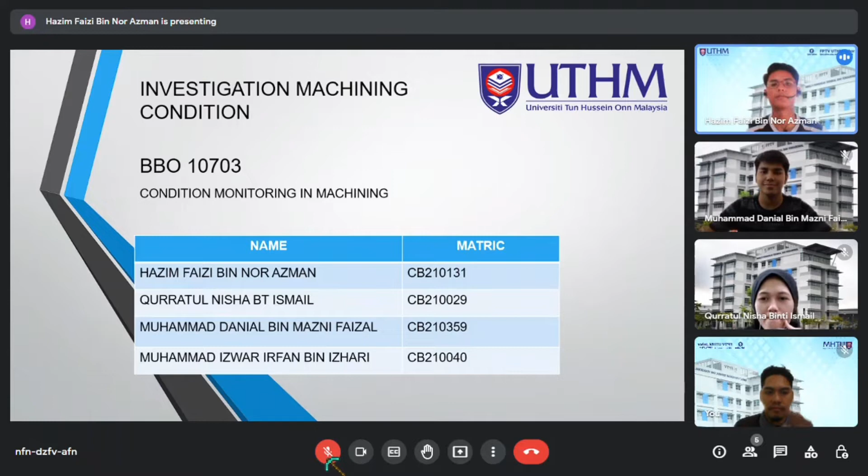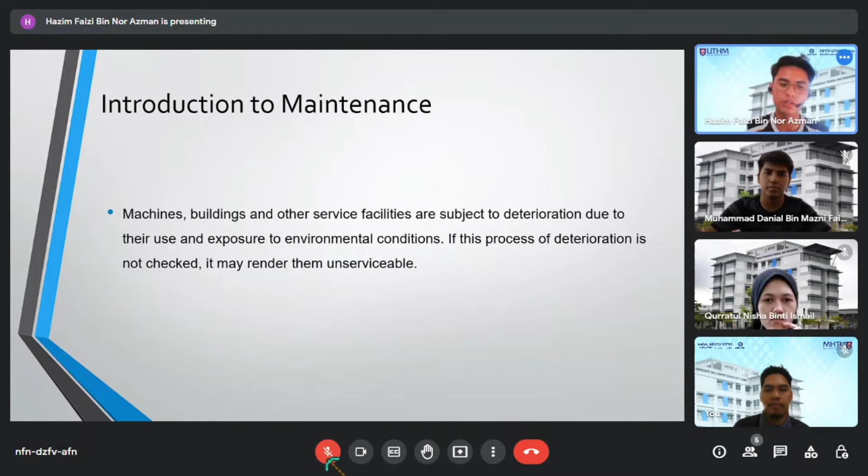Introduction to maintenance. Machines, buildings, and other service facilities are subject to deterioration due to their use and exposure to environmental conditions. If this process of deterioration is not checked, it may render them unserviceable. Next, I will pass it to Qurratul Nisha.

Thank you, Hazim. Next is smell. The smell of the coolant becomes offensive long before the coolant stops being effective. Next is compounding. The costs associated with wasting good coolant are the disposal costs of getting rid of it. Increasing the useful life of coolant has a direct saving on the cost of manufacturing by reducing the cost of the coolant itself and reducing the fees associated with coolant disposal.

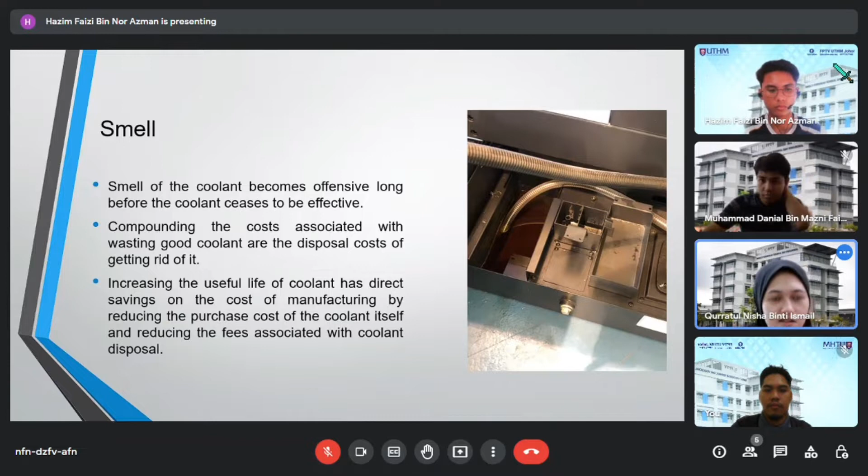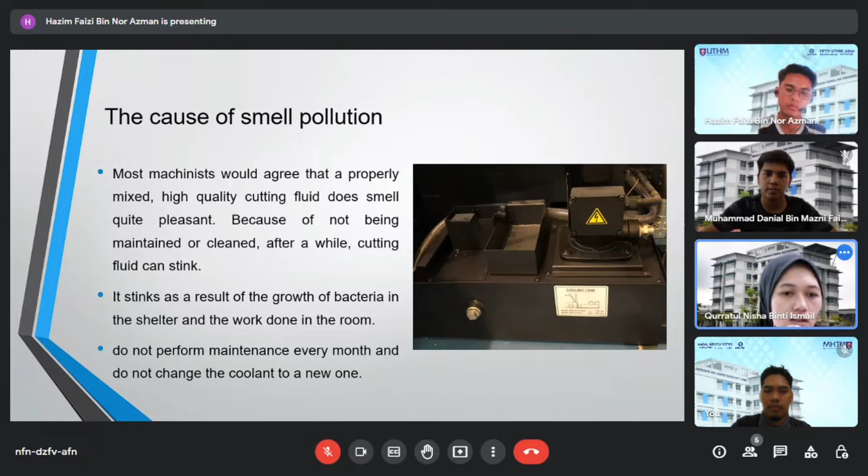The cause of the smell pollution. First, most machinists would agree that a properly mixed high-quality cutting fluid smells pleasant, but because of not being maintained or cleaned, after a while the cutting fluid stinks. It stinks as a result of the growth of bacteria in the shelter and the work done in the room, and not performing maintenance every month and not changing the coolant to a new one. Okay, thank you, Qurratul Nisha.

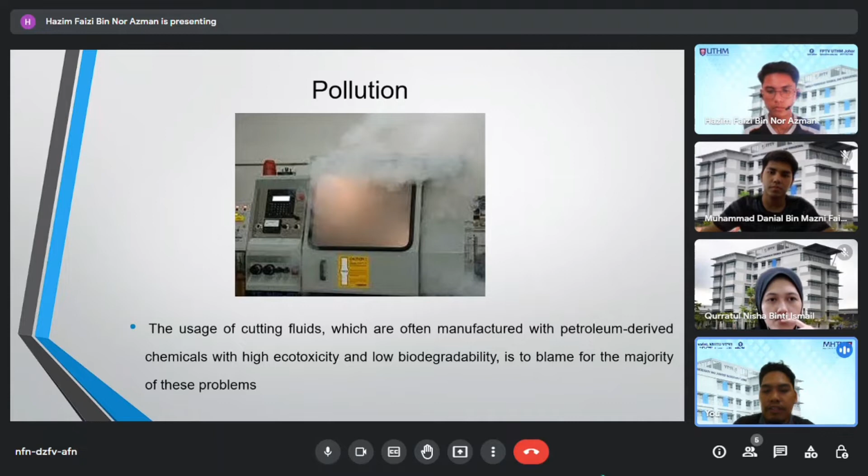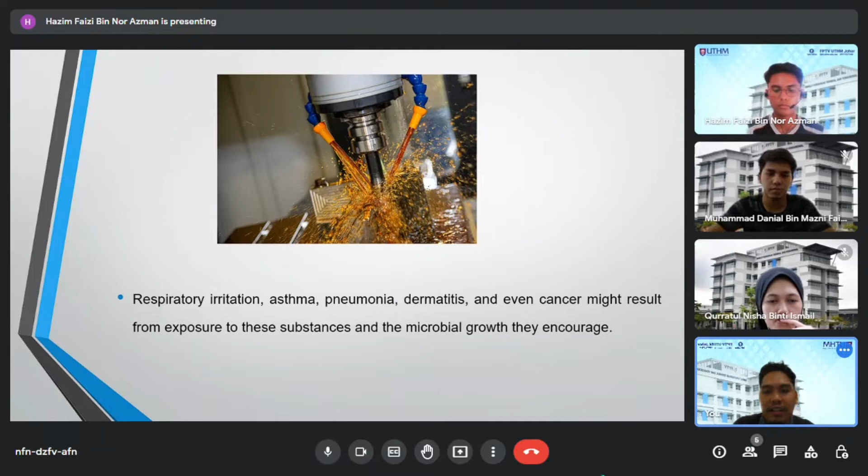Okay, next I will continue about pollution. The use of cutting fluids, which are often manufactured with petroleum-derived chemicals with high ecotoxicity and low biodegradability, is to blame for the majority of this problem. Respiratory irritation, asthma, pneumonia, dermatitis, and even cancer might result from exposure to these substances and the microbial growth they encourage.

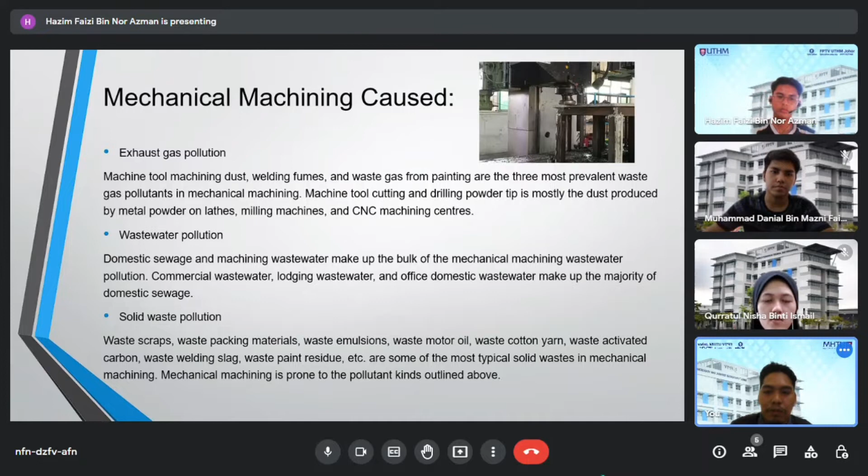And last, solid waste pollution. Waste scraps, waste packing materials, waste emulsion, waste motor oil, waste cotton yarn, waste activated carbon, waste welding slag, waste paint residue, etc. are some of the most typical solid waste in mechanical machining. Mechanical machining is prone to the pollutant kinds outlined above.

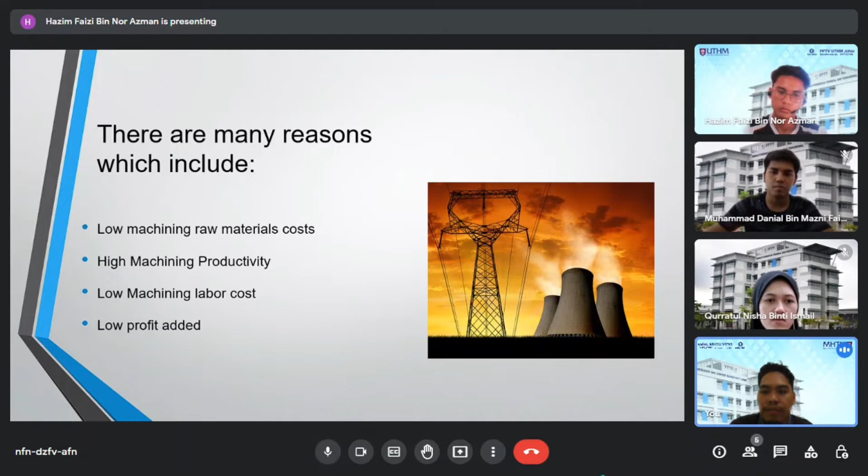Next, there are many reasons, which include low machining raw material costs, high machining productivity, low machining labor costs, and low profit added. Okay, next slide, I pass to Hazim. Thank you.

Next, I'm going to talk about noise on CNC milling. Users who are experienced with CNC machines are aware that noise will be produced when the high-speed spinning cutter head makes contact with the material. The knife on the tool is particularly prone to wear and breakage. When using a CNC machine tool, if the cutting sound is loud or screaming, it indicates that something is wrong with the machine's condition and allows for a quick analysis.

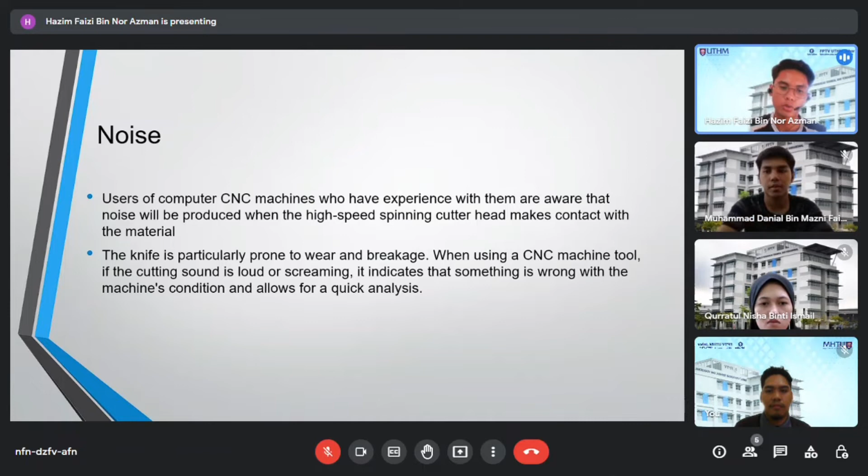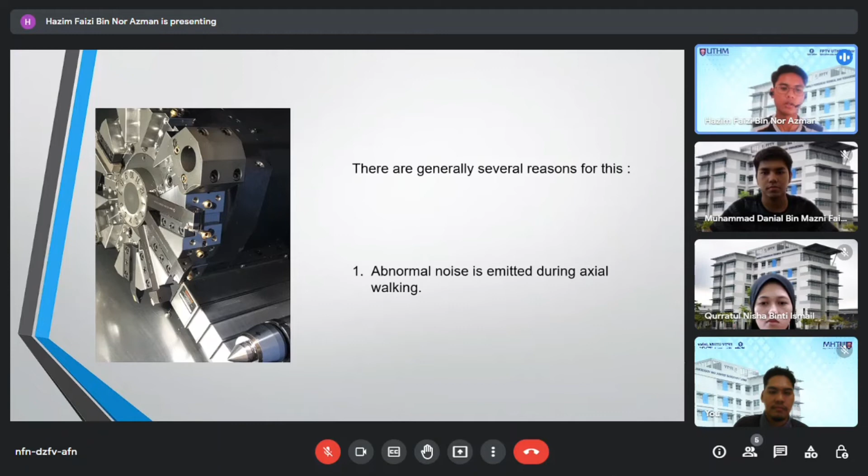So there are generally several reasons for this. To be precise, three reasons. Number one is abnormal noise emitted while moving: when you want to move the tool on the z axis or x axis, it will make a sound that is unpleasant, loud, or like scratching. It has a problem with the machine.

Number two is when the spindle motor is running, it will emit abnormal noise. When the spindle is spinning, normally in a CNC milling or lathe in good condition, it will not make any abnormal noise. It will go smooth. So if there's a problem with the spindle, we need to check whether the bearing inside it is worn or needs to be changed.

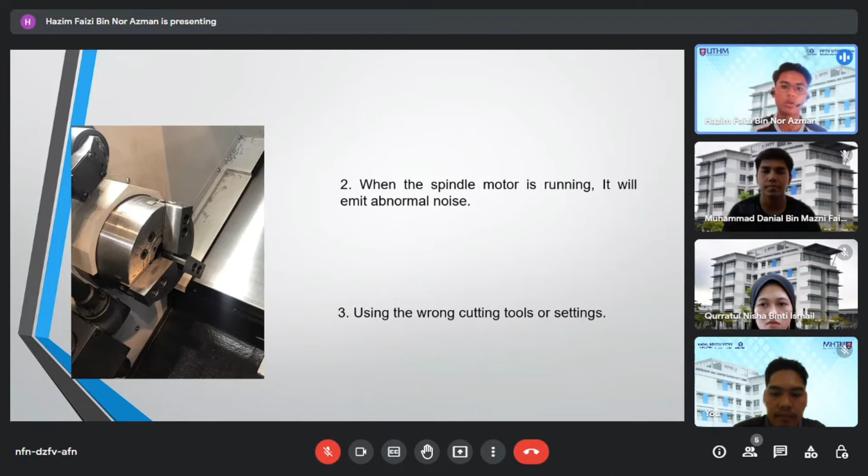And the third one, or the last one, is using the wrong cutting tools or setting. When cutting the workpiece, we need to make sure to select the right cutting tools for the workpiece. We cannot take it lightly using just one tool, or it will make the tool break, or the workpiece will not have a good finishing. So that is why it is important to use the right cutting tools or setting on the CNC lathe.

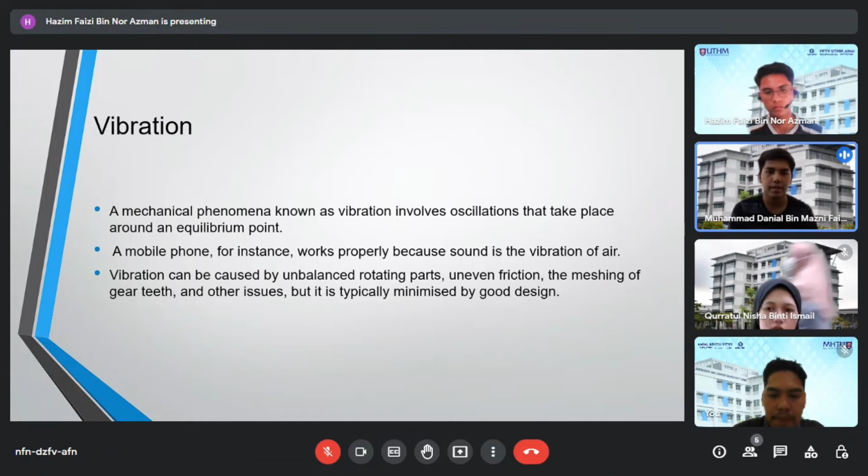I will talk about vibration in machining. Vibration: a mechanical phenomenon known as vibration involves oscillation that takes place around an equilibrium point. A mobile phone, for instance, works properly because sound is the vibration of air. Vibration can be caused by unbalanced rotating parts, uneven friction, the meshing of gear teeth, and other issues, but it is typically minimized by good design.

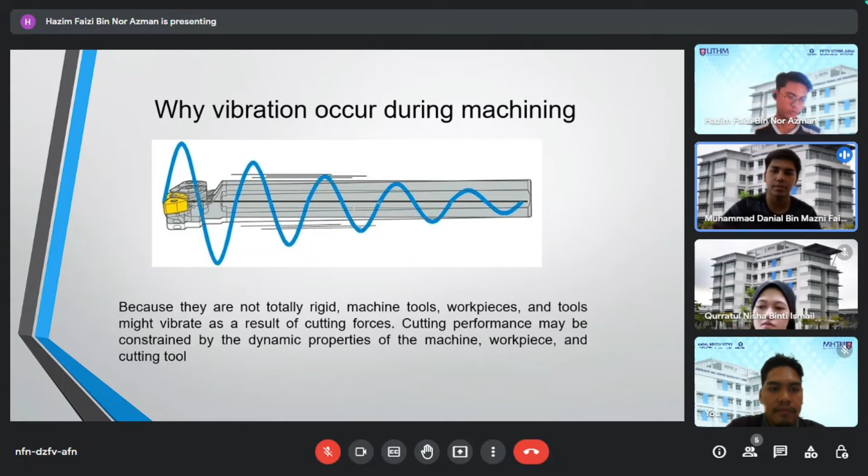Next. And why does vibration occur during machining? Because they are not totally rigid, the machine tool, workpiece, and tool might vibrate as a result of cutting force. Cutting performance may be constrained by the dynamic properties of the machine, workpiece, and cutting tool. Next. What are the different types of vibration in machining?

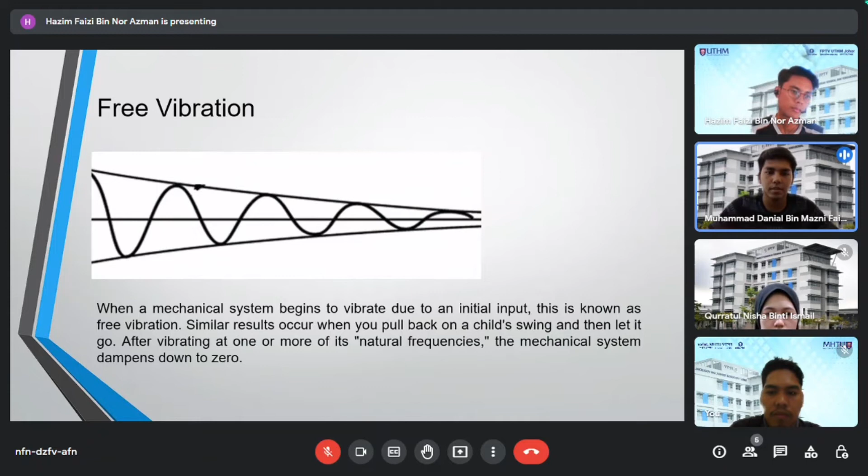Firstly is free vibration. When a mechanical system begins to vibrate from an initiation input, it is known as free vibration. It is the result of when you pull back a swing and then let it go. After initiation, at one or more natural frequencies, the mechanical system dampens down to zero.

Second is forced vibration. When a mechanical system is subject to a time-varying disturbance, such as a weight, displacement, or velocity, forced vibration takes place. The disturbance could be random, steady state, or periodic.

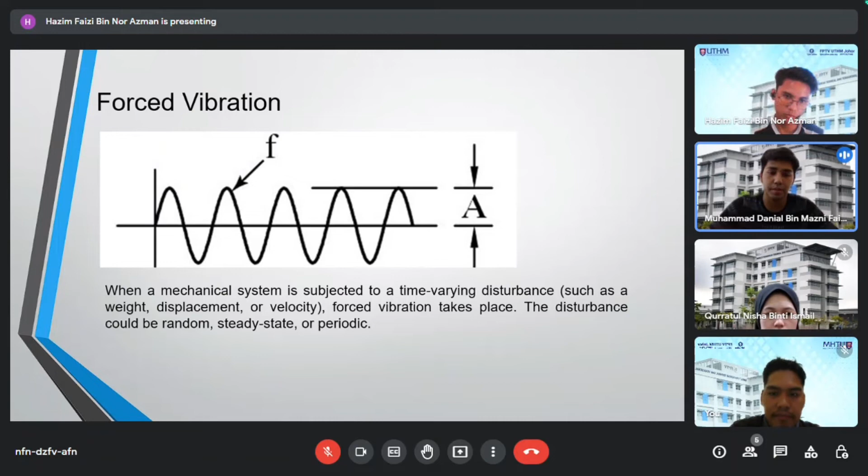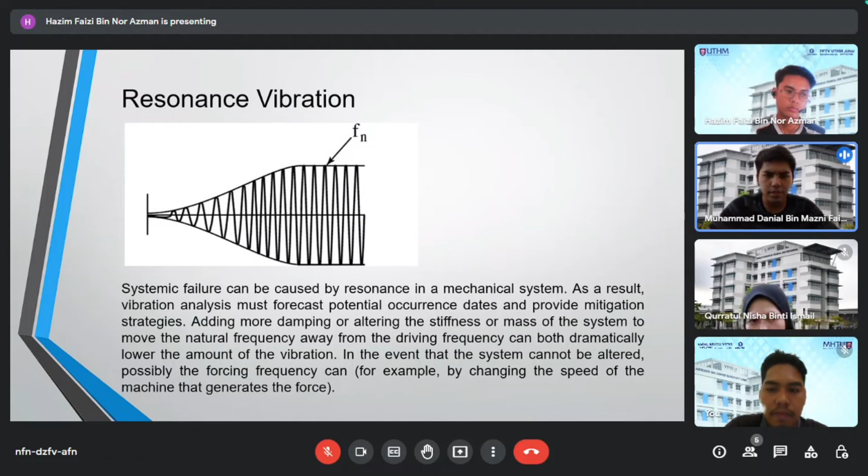Lastly is resonance vibration. System failure can be caused by resonance in a mechanical system. As a result, vibration analysis must forecast potential occurrence and provide mitigation strategies. Adding more damping or altering the stiffness or mass of the system to move the natural frequency away from the driving frequency can both dramatically lower the amount of vibration. In the event that the system cannot be altered, possibly the forcing frequency can, for example, by changing the speed of the machine that generates the force.

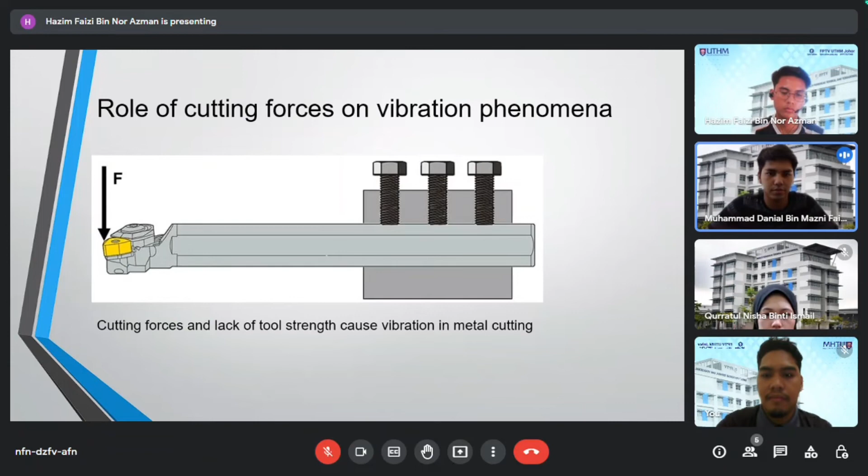Role of cutting force on vibration phenomena. For example, with this cutting tool, cutting force and lack of tool strength cause vibration in the metal cutting tool. In some situations, dynamic cutting force can lead to resonant vibration.

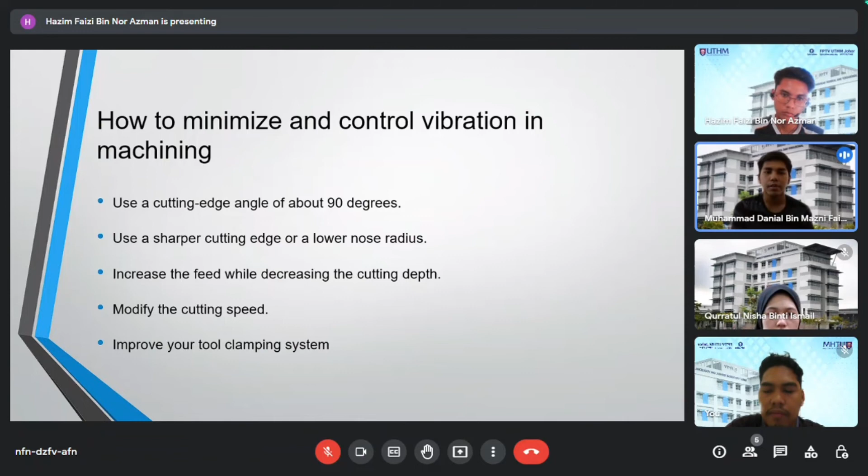This is how to minimize and control vibration in machining. First, use a cutting edge angle of about 90 degrees. Second, use a sharper cutting edge or a lower nose radius. Then increase the feed while decreasing the cutting depth. Modify the cutting speed. And lastly, improve your tool clamping system.

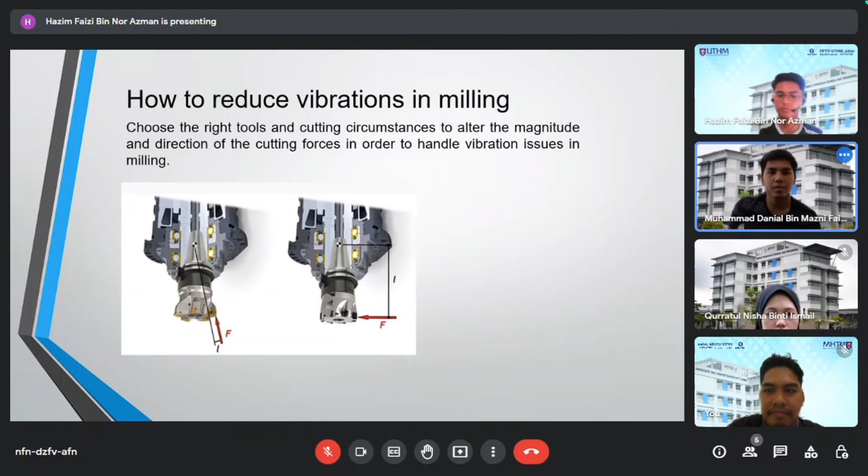And this is how to reduce vibration in milling. Choose the right tools and cutting circumstances to alter the magnitude and direction of the cutting force in order to handle vibration issues in milling. First, selecting a milling cutter with coarse pitch and clamping it with the least amount of overhang is recommended. Pick a cutting edge with a positive geometry.

Particularly when using Steadyline tooling, pick a milling cutter with a smaller diameter. Make your cutting edge radius modest. Choose a grade of carbide with a thinner coating. Use a larger feed for each tooth. For higher feed per tooth, slow down the rotation speed while keeping the table feed constant. Never lower the feed per tooth when there is vibration.

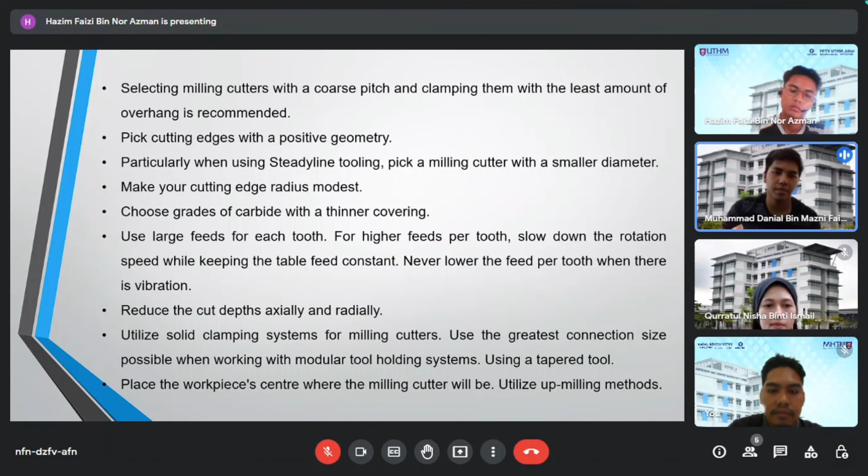Reduce the cut depth axially and radially. Utilize a solid clamping system for milling cutters. Use the greatest connection size possible when working with a modular tool holding system or using a taper tool. Lastly, place the workpiece center where the milling cutter will be and utilize the up milling method.

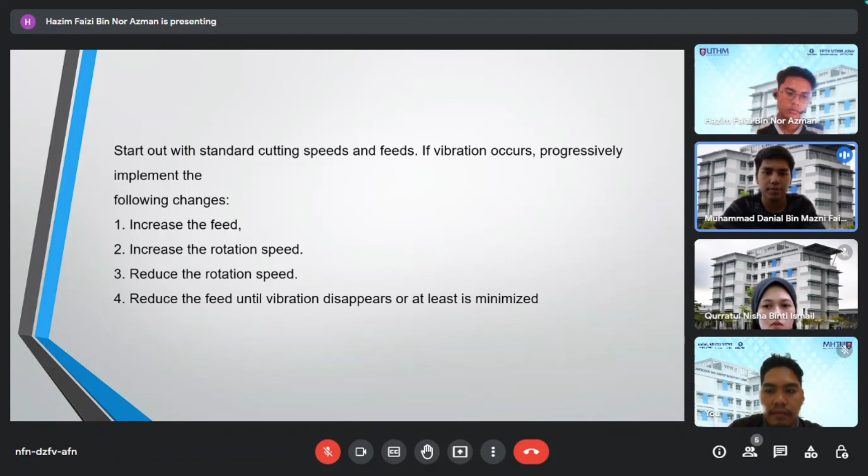This is also an example of how to reduce vibration in milling. Start out with the standard cutting speed and feed. If vibration occurs, progressively implement the following changes: increase the feed rate, increase the rotation speed, reduce the rotation speed, and reduce the feed until vibration disappears or at least is minimized.